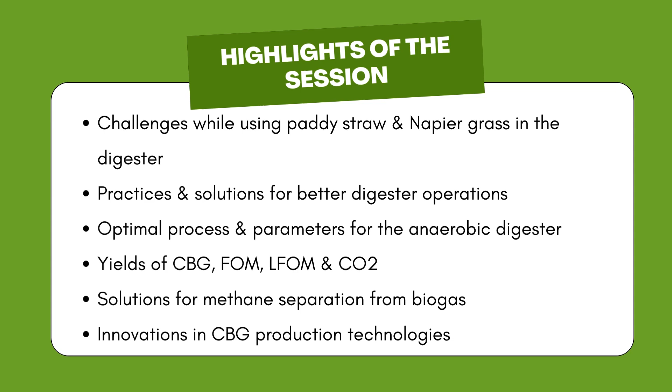Another youngster, so many youngsters today, which is a surprise to see in a CBG webinar. It is supposed to be a game which mature people play, a tough game.

Sai, I'm going to give a brief background. I want him to say a few things about what he has done, because he has done something very important in the entire ecosystem of CBG. His PhD, he told me yesterday that he is just about done his PhD. Only the last presentation or something is pending. And he is with this interesting firm called Renergy Dynamics.

The reason I want him to say a few words about himself and what he has done is he seems to be one of the first guys in the country to have done a lot of research at a PhD level on pre-treatment of cellulosic biomass. Am I correct, Sai? So I think that's exciting, because unless you get the pre-treatment correct, I have a feeling that we are going to talk a lot but achieve very little.

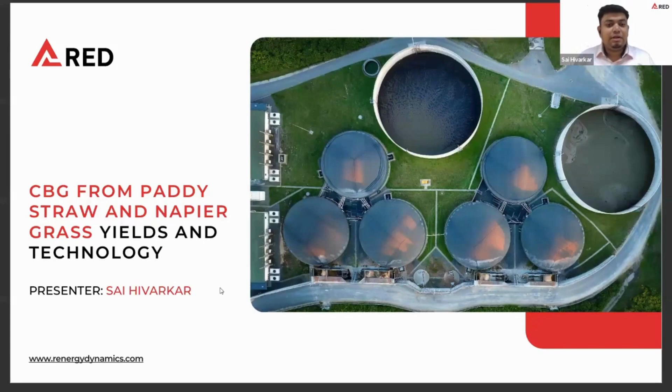So for today's topic, I'll be presenting on the yields and technology associated with CBG production from paddy and Napier grass. Next slide, please. So our two star products are paddy and Napier grass. Let's talk about the positives of both these feedstocks.

Paddy straw is basically the residue that is left behind in the field after the rice has been harvested. As India is a major cultivator of paddy, around 120 million tons of paddy straw is generated in India, and it is majorly composed of lignocellulose: cellulose, hemicellulose, and lignin, and it also has a certain amount of silica. The major advantage of paddy is that it is abundantly available, especially in the northern states of India.

If we look at the biomethane potential of paddy straw, the conservative value says that around 200 to 250 cubic meters of CBG can be extracted per ton TS of paddy straw. Now, paddy straw requires pre-treatment, and if we rightly select the technology to pre-treat it, we can expect that the BMP, the biomethane potential, can be increased somewhere around 10 to 30%, which will help us garner some more

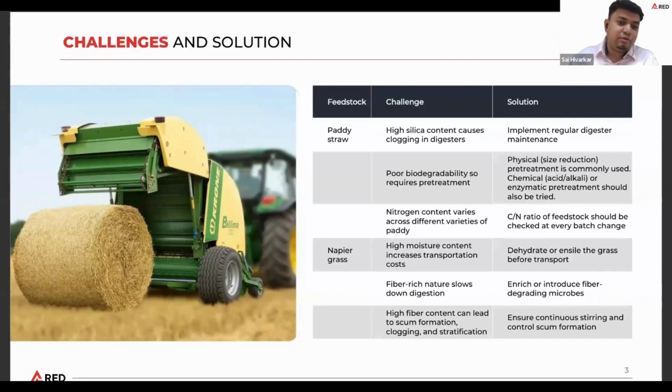So again, like paddy straw, we also need a digester maintenance SOP, and that needs to be properly followed, so that we don't end up creating a problem for our digester. Next slide.

Now, talking about the process parameters of an ideal, healthy running digester. This is from the literature. If the anaerobic digestion technology is of the mesophilic range, then the digester temperature should be around 35 to 40 degrees Celsius. And if the technology is thermophilic, then the temperature of the digester should be around 50 to 60 degrees Celsius. In both these technologies, the pH should be around 6.8 to 7.4.

This range of pH is ideal for methanogenesis. So, if your digester pH is not in this range, then the methanogenesis step won't happen, and you will not get the desired amount of methane. Another aspect is to maintain the carbon to nitrogen ratio. Ideally, it should be around 25–30:1. That means 25 to 30 molecules of carbon for each molecule of nitrogen. Another aspect that people generally overlook is the carbon to nitrogen to phosphorus ratio.

Now, to have an efficient methanogenesis step, wherein the ideal amount of methane is produced, phosphorus is also important. So the ideal range is around, for 120 molecules of carbon, you should have 5 molecules of nitrogen and 1 molecule of phosphorus.

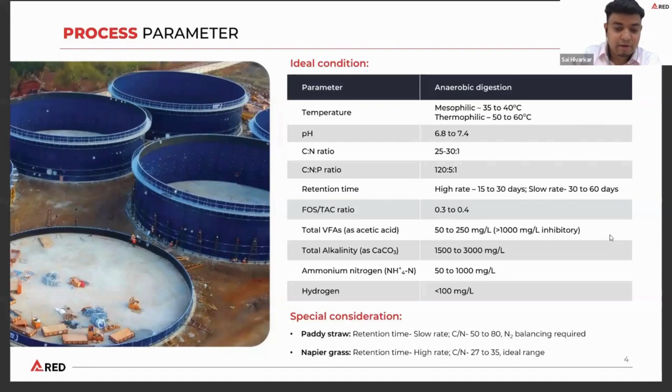Sai, if you can conclude in the next couple of minutes.

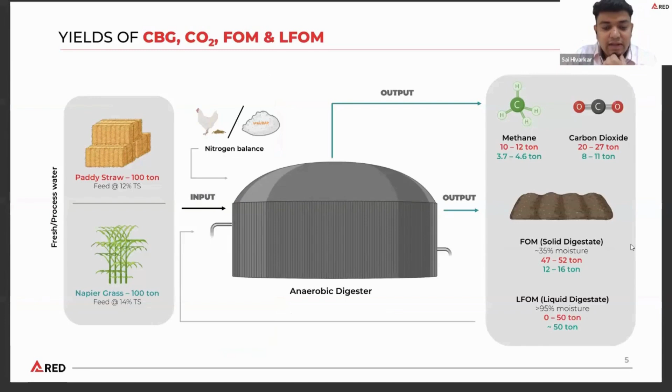Yeah. Now talking about the yield of CBG from paddy and Napier. For 100 tons of paddy, we can expect around 10 to 12 tons of methane and some 20 to 27 tons of CO2. Talking about the digested FOM, it generally comes out around 47 to 52 tons of solid digestate. And talking about LFOM, usually in the paddy straw process the slurry gets recirculated, so it depends on a case by case basis, but it would be in the range of 0 to 50 tons.

Now talking about Napier grass, from 100 tons of Napier grass, we can expect around 3.7 to 4.6 tons of CBG and 8 to 11 tons of CO2. And talking about FOM and LFOM, solid digestate comes out around 12 to 16 tons, and LFOM comes out around 50 tons.

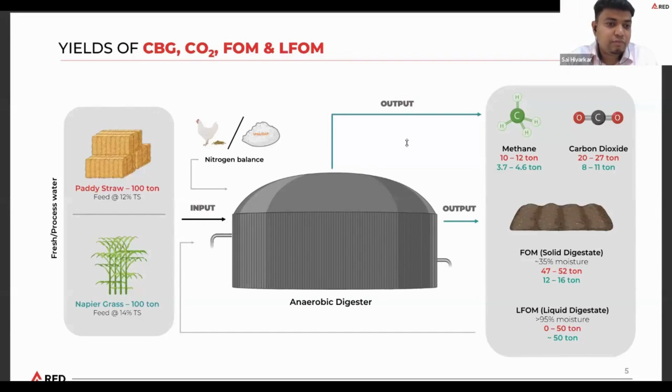Now, what has happened is in this process, only methane is the star product that is usually being sold. So as it was rightly mentioned in the earlier session, FOM and LFOM should also be commercialized, and they also need to be sold at a premium price. Along with that, I just wanted to highlight that carbon dioxide coming out of this digester is also of a biological origin. So that also needs to be promoted, to be added into the food and beverage industry. Next slide, please.

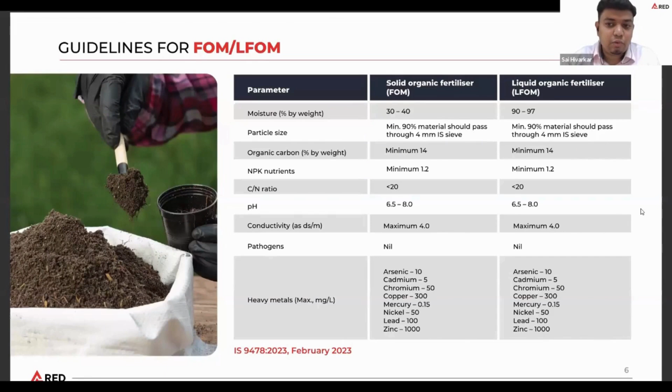Now, in India, government has set up certain guidelines for the use of FOM and LFOM as fertilizers. These guidelines are as per IS standards, and they are publicly available, so people can go through them. The only thing that needs to be taken care of is the presence of heavy metals in the fertilizer, so that we don't put heavy metals into our food chain. Next slide, please.

Now, this LFOM coming out of the digester, as it was rightly discussed in the earlier session, is actually a good source of organic fertilizer because it has all the nutrients in their bioavailable form, because all the nutrients like nitrogen, phosphorus, ammonia, some trace elements like calcium, magnesium, are the byproducts of a biological process. So eventually it is more easily available to the plant. If you apply LFOM and FOM into the farm fields, it is more easily absorbed by the plant as compared to chemical fertilizers.

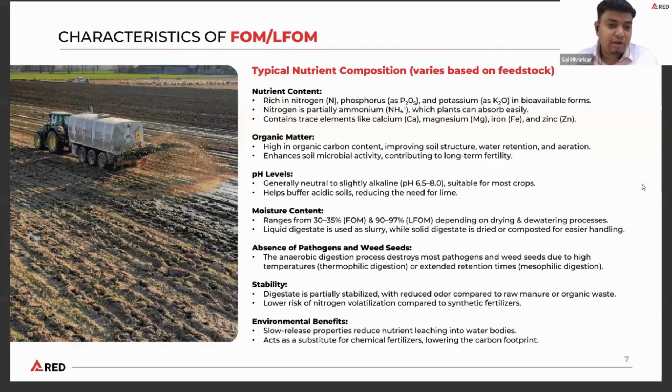Second thing is, the pH level of this fertilizer is in the alkaline range. So if a certain area's soil is acidic, it acts as a buffer and it stabilizes the fertility of the soil. And the main environmental benefit of LFOM is it closes the loop. You are extracting carbon from the soil, and you are again putting it back in the form of LFOM. Next slide, please.

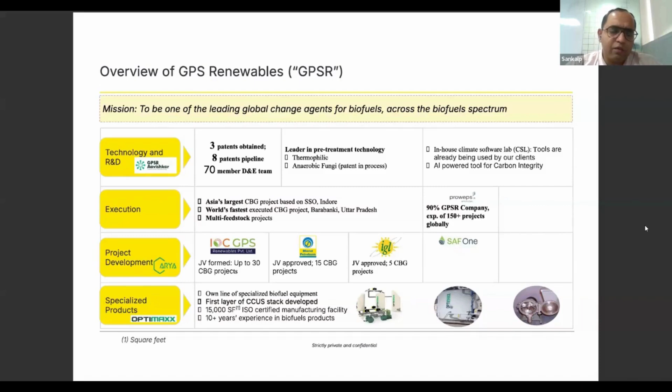Just to mention a few words, we have installed Asia's largest CBG project based on SSO. Then we have installed the fastest executed CBG project in Uttar Pradesh. Proweps is a technology company in GPS; it's now a subsidiary of GPS. In addition, we have our project development arm under which we will be owning biogas projects with OMCs like IOC, BPCL. Plus, we have our own division for specialized products which supports improving the gas yield, under which we offer membrane technology, and some other products are under development which will help in improving the gas yield. Next slide, please.

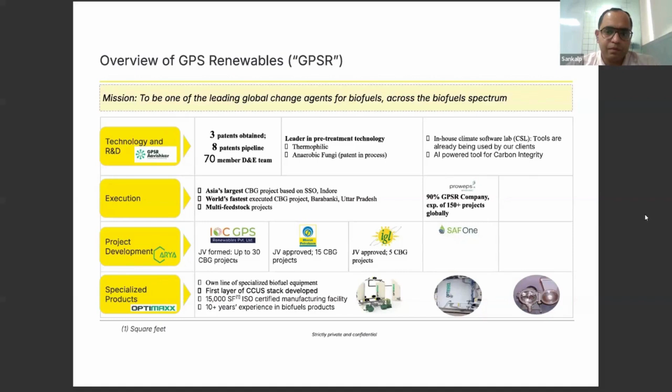So this is the first topic, innovations in pre-treatment and digestion. Next slide, please. So a few words about why pre-treatment is required. This is a typical composition of lignocellulosic biomass. It is across the spectrum of all kinds of agro residues and partially for Napier grass also. So typically it has cellulose, lignin, and hemicellulose.

It is bound material. So here minimum pre-treatment, physical pre-treatment, is always required because typically biomass is captured in the form of bales. On the plant we receive huge bales, maybe rectangular or spherical bales. So debaling followed by shredding or hammer mill to bring material to a smaller size which can be handled in the downstream process is compulsory. It needs to be there.

Then there are other pre-treatments which come after physical pre-treatment. It can be chemical, physiochemical, or biological. Chemical and physiochemical will be energy intensive, plus chemical pre-treatment tends to generate a lot of waste material which needs to be further treated separately. I think that problem is already being faced in the 2G ethanol industry. So our focus area is biological pre-treatment.

So once material is made to a smaller size which can be handled with current technology, then we will move on to the biological pre-treatment. Next slide, please. Can we have the next slide, please?

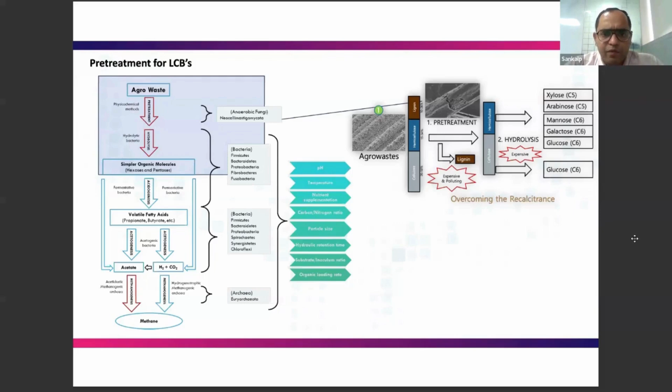And once these sugars are produced, it will be a conventional biogas process, where sugar gets converted to volatile fatty acids, then volatile fatty acids get converted to acetate, H2, CO2, and finally we produce methane. The system here is totally biological, and once we have a material which can be handled physically, the system will work. So can you move to the next slide, please?

So these are the benefits of the system we are proposing. It works at ambient or mesophilic temperature. We do not need chemical or thermochemical treatment, which will reduce a lot of energy use. Also, we will not produce unwanted chemicals. It definitely gives higher biogas yield because the sugars present in the lignocellulosic biomass are available for further degradation by other bacteria.

AF works by dual action. It has a physical penetration, where tentacles, just using a simpler word, of this fungi penetrate into the biomass, and it also releases external enzymes. It's called a cellulase battery of enzymes, which breaks down the bond between lignin and cellulose. It releases cellulose and hemicellulose into the nearby environment, in the slurry, and then it can be attacked by other bacteria.

It's a natural process. Anaerobic fungi were initially used to improve digestion in cows. So it's a totally natural process. It does not have any environmental harm. And since it is a biological process, it's multi-substrate. It need not be restricted to a single substrate; we can work on multiple substrates with it. The only point here is limited expertise available in the field. So we are working to build expertise around that also.

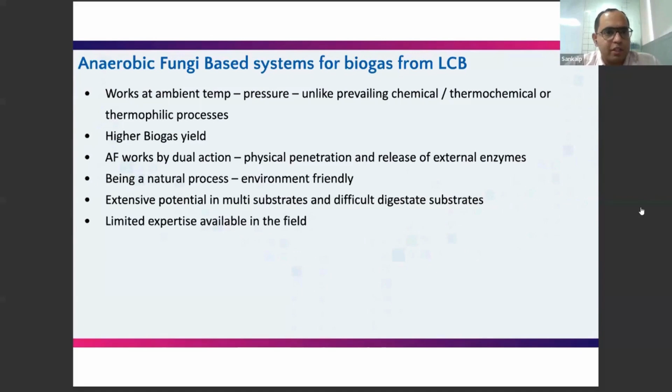Next slide, please. So this innovation I talked about is how we can get maximum biogas from lignocellulosic biomass. In the upcoming slide, I will talk about how we can extract that methane to produce maximum CBG from it. Next slide, please. So this is very fundamental. I thought I would spend a couple of minutes explaining membrane technology at a fundamental level.

So we have this wording, compressed biogas. It's raw biogas, just not to confuse with CBG. It is raw biogas compressed at about 10 to 14 bar, and it passes through polyimide hollow fibers. These fibers are selective. They allow gases like CO2, O2, moisture, and H2S to pass through their pores, and methane comes out as a retentate. So at the outlet of this system we get methane-rich gas with maximum methane percentage and some portion of CO2.

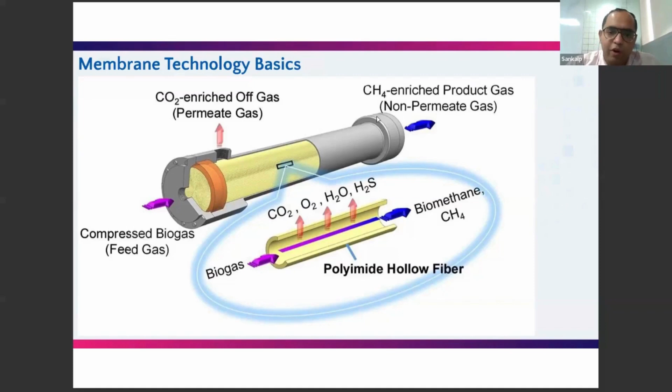Since it also removes H2O and H2S, we make sure that after this treatment the biogas is compliant with the CBG requirement from the government. Next slide, please.

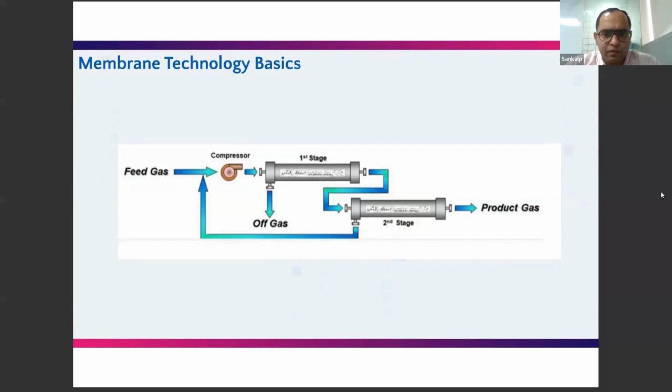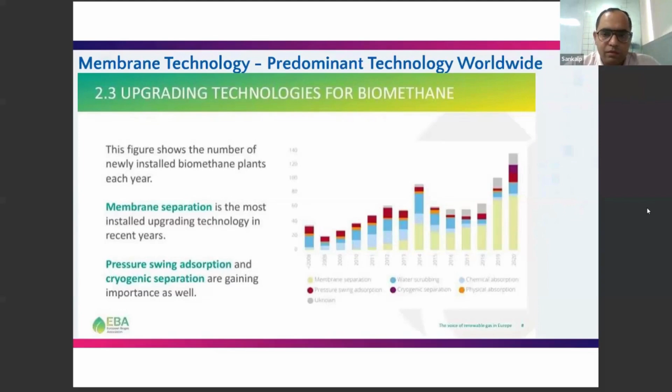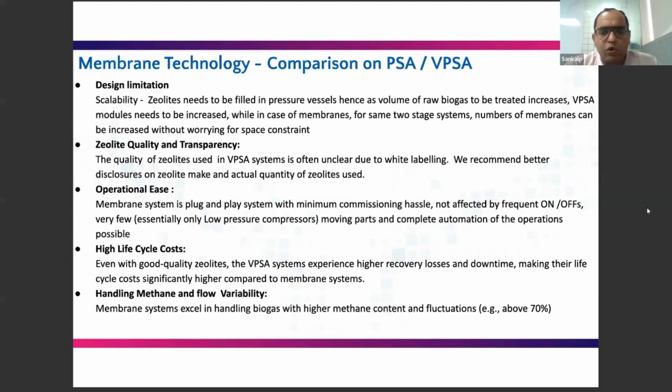We can go as low as 30% turn down ratio, where my system can still perform better. And turn on, turn off does not impact the quality of CBG, which helps in initial stages. During the ramp up phase, when we do not have maximum production capacity, in that stage also we can make sure that the CBG production is of required quality. And again, handling flows and different methane percentages is much better in membrane systems. Next slide, please.

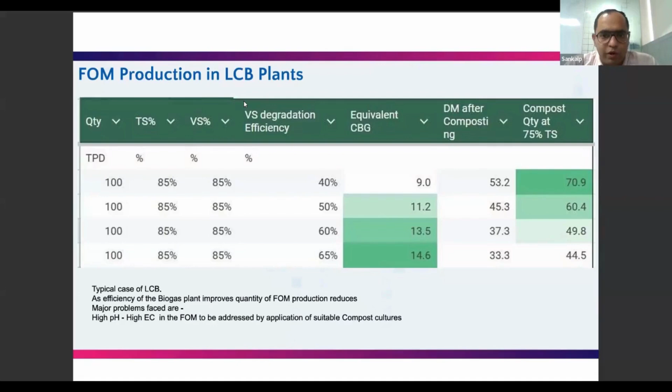So now I will touch upon FOM and LFOM specifically in the case of lignocellulosic biomass plants. Next slide, please. So this is a very comprehensive table for an LCB plant. When I say LCB, it's lignocellulosic biomass; consider the typical composition, which has 85% TS, 85% VS, and we have multiple VS degradation efficiencies based on the technology we adopt. I just wanted to bring to everybody's notice that production of compost totally depends on how much solid we recover after digestion. As we keep improving our digestion efficiency, we shall expect a reduction in compost production. It looks very straightforward, but that needs to be considered in all business models.

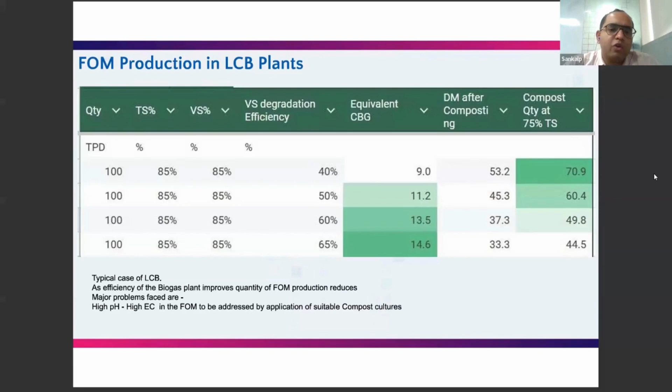As we strive towards producing more and more CBG, there will be a compromise on compost production. Also, in LCB plants, typical issues faced are high pH and high EC, because of the inherent properties of lignocellulosic biomass. This can be covered with suitable application of compost culture. They are not new; they are publicly available in the market, but they are required to produce the required quality of FOM. Next slide.

So, since PMC has surplus water, around 75% water in it, in such a plant we can expect, because of positive water balance, to produce LFOM. But the other biomass, when we talk of bagasse or agri residue, bagasse we expect to be water neutral. We don't need much water, but we won't get LFOM also.

But agri residue plants are water negative plants, so we need to add fresh water into them. So in such a plant, if it is a monosubstrate agri residue plant, we cannot expect LFOM production unless it is a business decision to add more fresh water and extract LFOM. But the plant as such, when we are operating, we do not expect LFOM production from it.